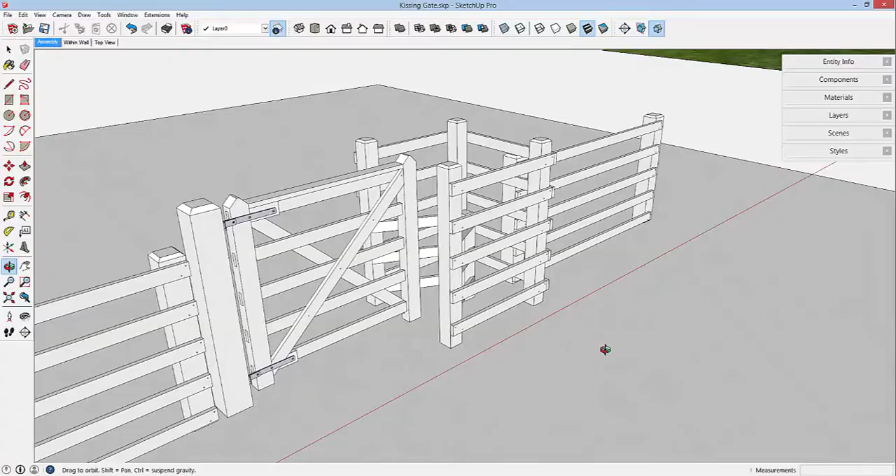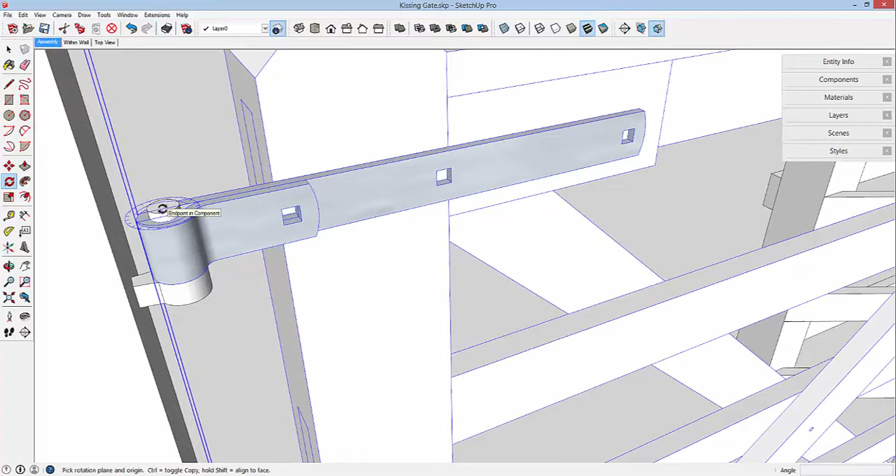This means crossing many fences, both wood and stone, placed periodically for control of the herds of animals. Hadrian's Wall Path is one of the most visited official national trails, so it's quite a challenge to provide hundreds of hikers each day access through these fences while maintaining animal control. As you might suspect, having gates that require opening and then secure closure is a substantial risk. So the trail is equipped with several types of gates and stiles, that is, ladder-like fixtures, that do not require human action to reclose the opening.

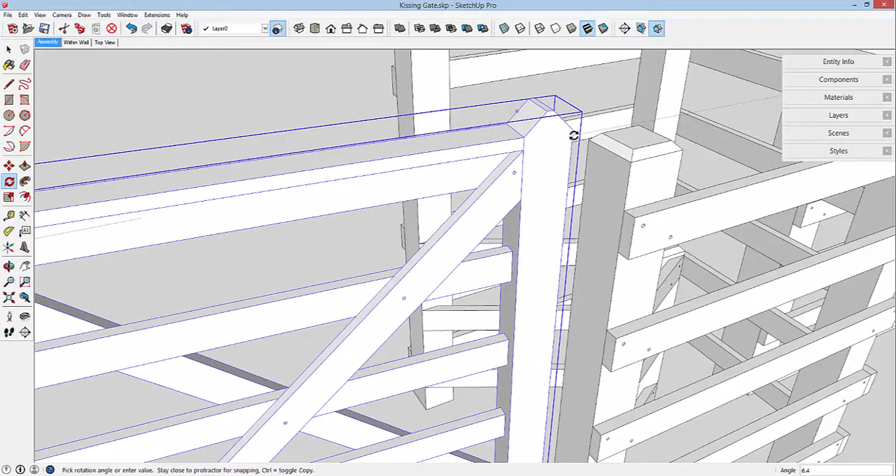I was particularly interested in the kissing gates, of which there must be hundreds along this path. This type of gate has a hinged portion that restricts passage of one person at a time. No matter where the hinged portion rests, there is no space for a cow or sheep to pass. This requires a restricted width opening, but also must provide space for hikers equipped with full-size backpacks.

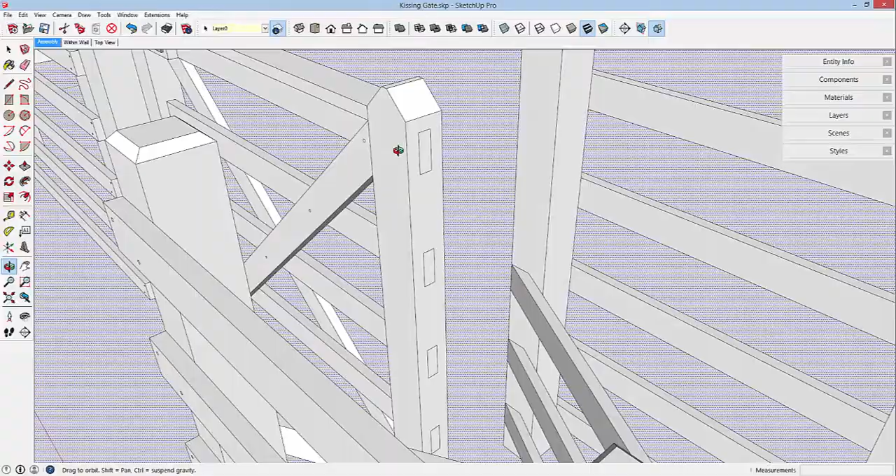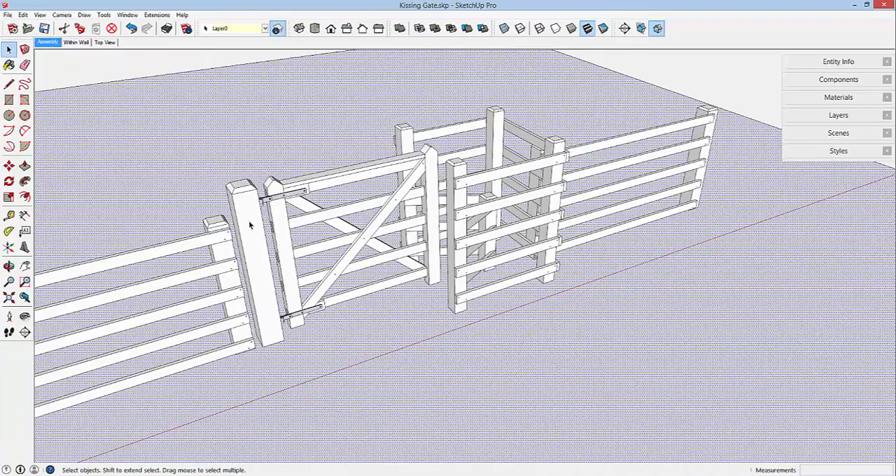When you enter the opening, you push the rotating portion forward to open space, and then you must rotate your body halfway through, then pull the rotating portion in the opposite direction to open up the exit path. I was impressed with the sturdy construction of these gates and fences. In English oak, these gates are built to last for years and survive the continual operation of hikers. Joinery was also impressive, with through mortise and tenon joints and sturdy cross bracing.

So here is that, looking down from the top into that box opening, and you can see the restricted path through there.

And often these same kissing gates were positioned between stone wall structures that were built out of stones that were actually removed from Hadrian's Wall years ago.

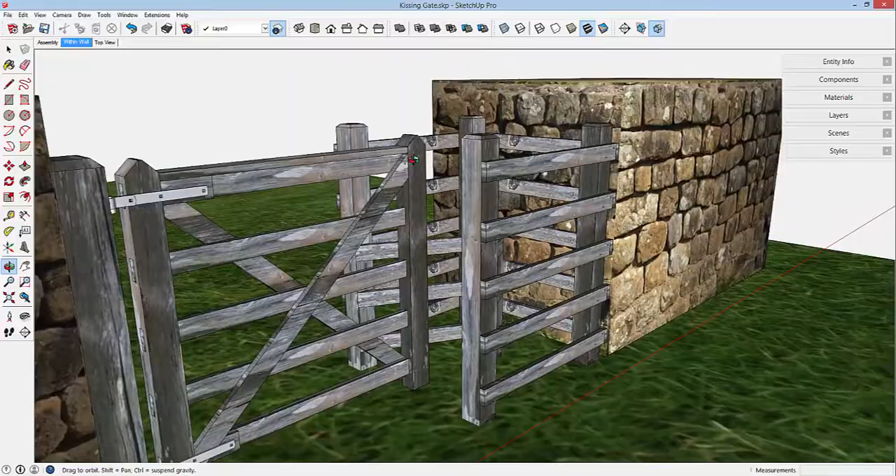So here's that same fence, although I've coated it with materials. That is, I imported a picture of the grain from the oak on one of these fences and placed it on the SketchUp file, and also the material of the picture of the stone wall itself.

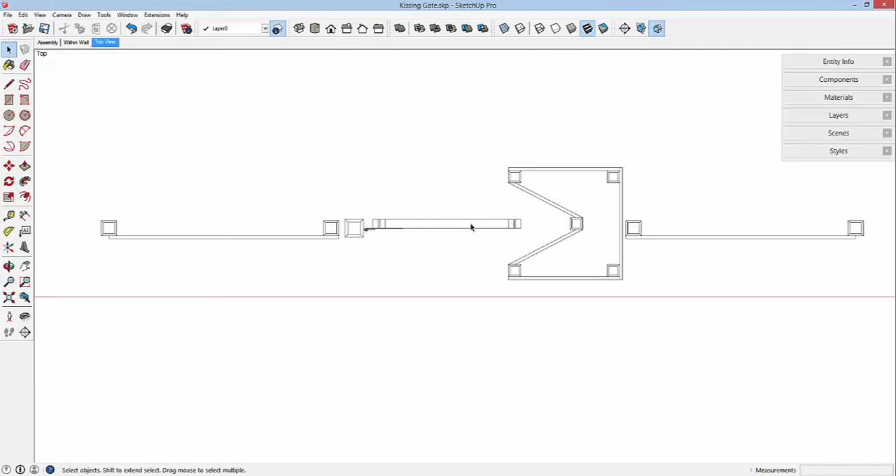Here's a top view that gives you a better feeling for the configuration of the opening in the path and the swinging gate. I'll just open up the swinging gate again, selecting the component, then choosing the rotate tool, positioning it on the fulcrum point, and then grabbing the end of the gate and swinging it over till it hits the fixed portion, and then it goes back and forth.

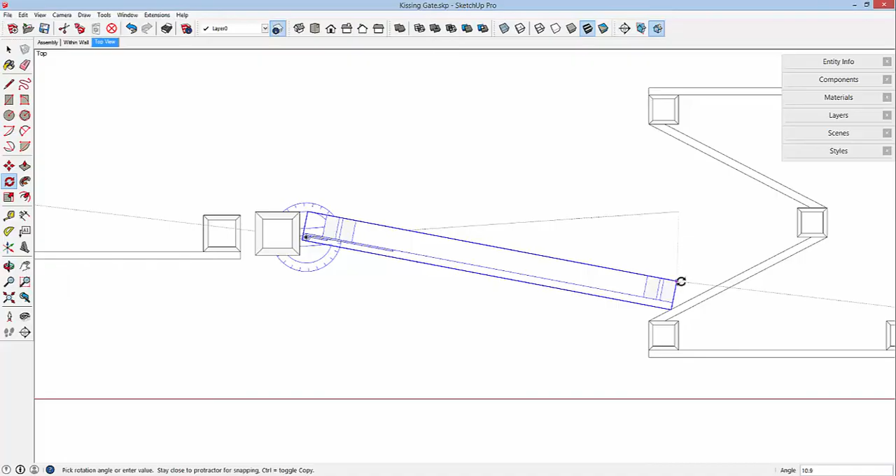That opens up to get into it, and then you turn around and rotate it the other way to get out. Very functional and safe kind of fence and gate for these kind of conditions.

So here it is, a kissing gate at the stone wall.